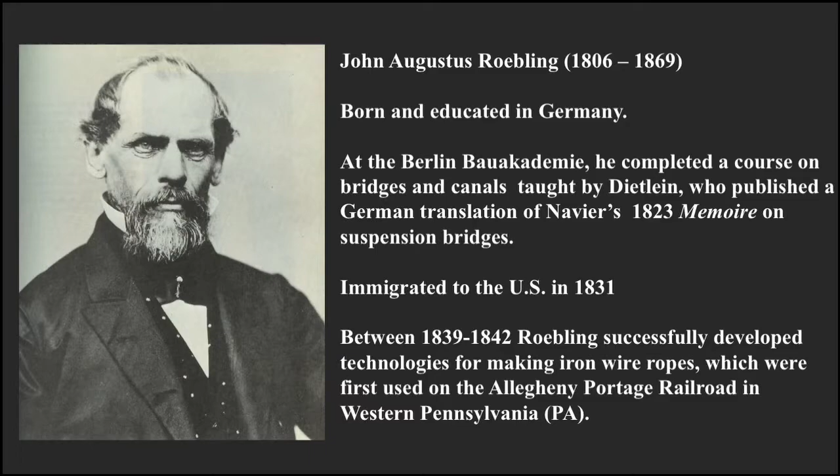His first suspension structures were built between 1845 and 1850. In 1845, he built the Allegheny Aqueduct in Pittsburgh, Pennsylvania, and a year later he completed the Smithfield Street Bridge, also in Pittsburgh. Then between 1847 and 1850, he built 4 suspension aqueducts for the Delaware and Hudson Canal Company in eastern Pennsylvania. Therefore, he built 6 suspension bridges in just 5 years.

Remarkably, Roebling developed 3 fundamental technologies that are still widely used today. The first is the in situ, or in-place, spinning of suspension cables. Second is the tight wrapping of suspension cables with wire. And lastly, he developed cable anchorages that are easily constructed, functional, and permanent.

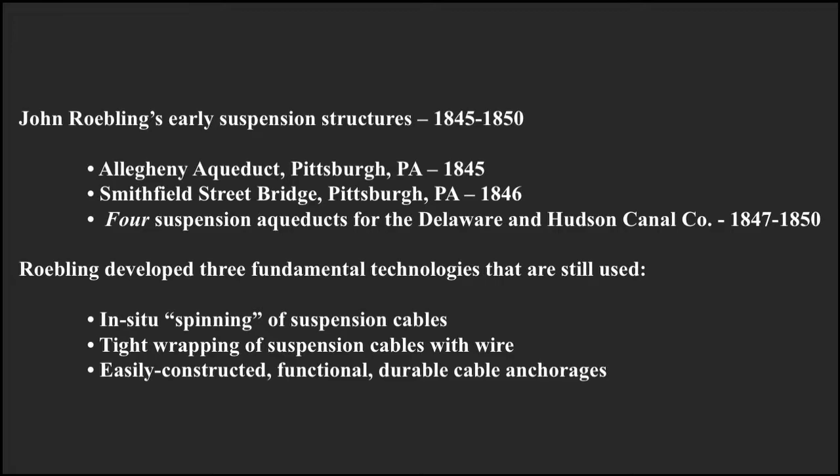The basic cable spinning method devised by Roebling in 1845 is shown on this sketch. Roebling built 2 horizontal wood pulleys, or sheaves, about 10 feet in diameter on opposite sides of the river, about 1,100 feet apart. He then strung an iron wire clothesline, or paternoster, between them, with vertical supports spaced 340 feet apart. He attached 2 spinning wheels, as shown, on the clothesline.

Roebling pre-spliced and wound iron wire on large spools. He then placed wire on the wheel rim, held one end, and pulled the spinning wheel across by having a horse rotate the pulley, thus pulling a hairpin of wire across the river. The spinning wheel on the other side of the clothesline came back empty, but the process was repeated by rotating the pulley in the opposite direction.

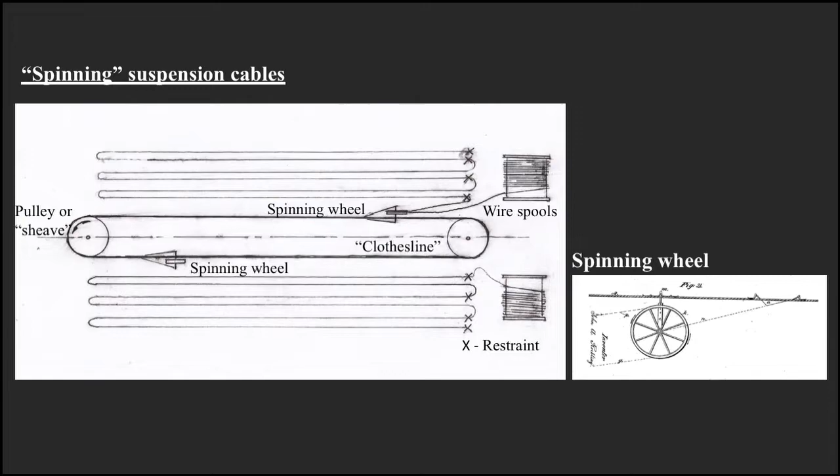Once the parallel wire cables were assembled, Roebling wrapped them tightly with wire using his patented machine. This method is still used today, after 175 years. It is a very effective way of inhibiting corrosion of the wires and moderating differences in the temperatures of the wires when, say, one side of the cable is in direct sunlight.

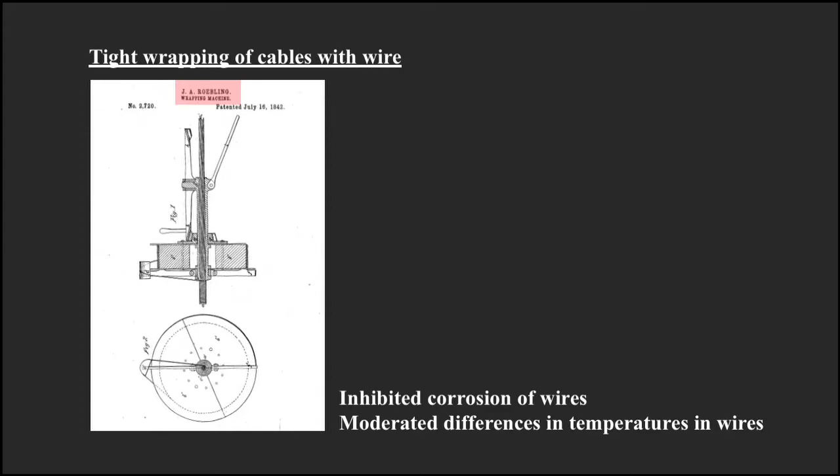In 1845, there was no standard method of anchoring cables. Roebling designed easily constructed, effective anchorages that proved to be enduring. His patented anchorage design featured a transition from wire cables to wrought iron eye bars outside of the anchorage, and a large cast iron plate for attaching end anchor bars. The wrought iron anchor bars were fully encased in protective hydraulic mortar to inhibit corrosion.

He placed wooden mats at the base of the anchorage to engage the entire masonry mass to resist pullout and overturning. Roebling relied solely on the dead weight of the masonry block for anchorage. He did not rely on the strength of the surrounding soil.

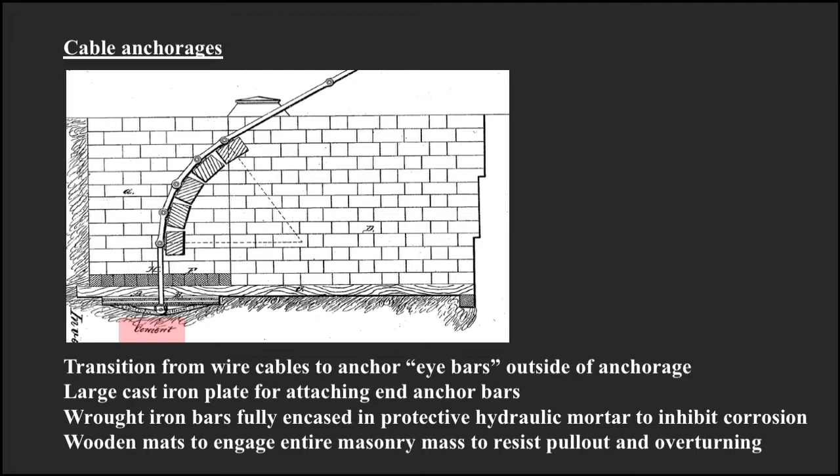John Roebling died, unfortunately, in 1869 after an accident, but his sons, Washington, Charles, and Ferdinand, continued his legacy. Washington Roebling and his wife Emily completed the firm's great work, the Brooklyn Bridge, in 1883. Ferdinand managed financial aspects while Charles focused on improving production technologies. Edmund did not actively participate in the enterprise, and William died as a young boy. However, by 1918, both Ferdinand and Charles had died, and Washington was over 80 years old.

Engineering leadership had to be provided by others, notably by Charles C. Sunderland. Sunderland was born in 1881 in the district of Northowram, County of York, near Halifax, United Kingdom. He immigrated to the U.S. as a 9-year-old boy in 1891. The family settled in Esopus on the Hudson River, about 75 miles north of New York City.

None of his employment records or other papers I examined noted his education. It is possible that he was largely self-educated. Also unknown to me is why he came to seek work in Trenton, New Jersey.

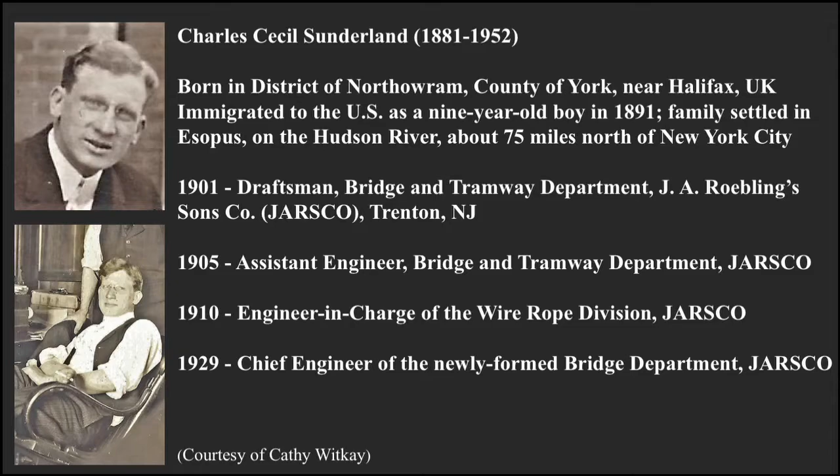In 1901, he was hired as a draftsman in the bridge and tramway department at Roebling's. By 1905, his title was assistant engineer in that department. By 1910, at age 29, he was engineer in charge of the wire rope division, surely one of the most important positions at Roebling's, since wire ropes were their signature product.

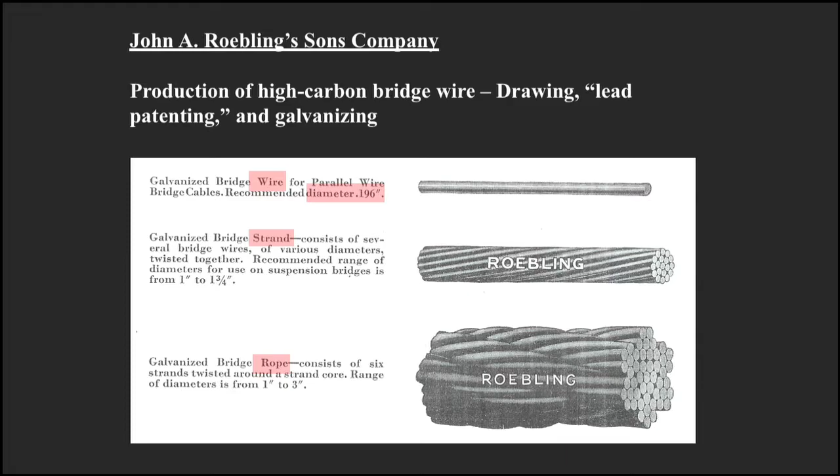The basic component that Roebling produced was high-strength steel wire. Wires were then helically wound to make strands, which in turn were used to make wire rope, a very highly engineered product. Rope designs and rope-making machines were the purview of Charles Roebling.

This is a patent for a specific type of wire rope, filed late in his life in 1915 and only granted in the year of his death, 1918. One of the largest Roebling machines for making rope was about 60 feet tall and held 80 tons of spooled wire on its base. It has been designated a mechanical engineering landmark by the American Society of Mechanical Engineers.

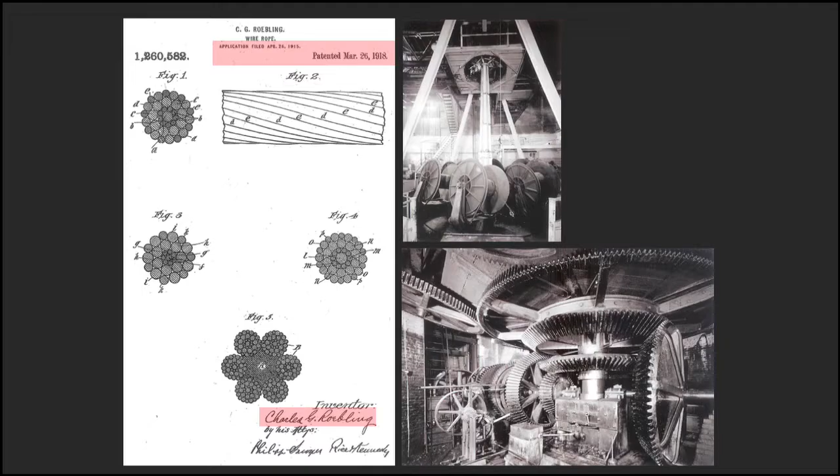Since by 1910 Sunderland was the engineer in charge of the wire rope division, he must have worked very closely with Charles Roebling. In 1926, the year Washington Roebling died, the design of the George Washington Bridge over the Hudson River in New York City was finalized.

The principal design engineers were Othmar Ammann, chief engineer of the Port of New York Authority; Leon Moisseiff, appointed as advisory engineer on design for the Port Authority; and Alston Dana, appointed as engineer of design in charge of the design division, who had a staff of 30 engineers and draftsmen working under him.

Both Dana and Moisseiff had previous experience in suspension bridge design, but this was Ammann's first suspension bridge. The final design had a main span of 3,500 feet and an upper deck with 7 traffic lanes. A second deck for 4 projected rail lines was added only much later. There were 4 main suspension cables, each with a diameter of 36 inches.

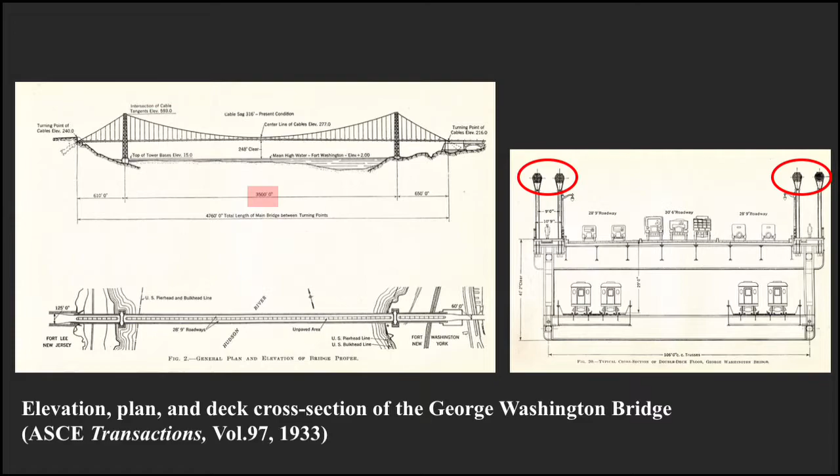Charles C. Sunderland was responsible for preparing Roebling's bid for supplying the wire and anchorage steel and for erecting the cables of the George Washington Bridge. Roebling won the contract with a bid of $12,193,000, which was about 40% of the total cost of the bridge proper.

Sunderland was appointed Roebling's chief engineer for the execution of the George Washington Bridge contract. The scale of the work that Roebling had to complete was unprecedented and daunting.

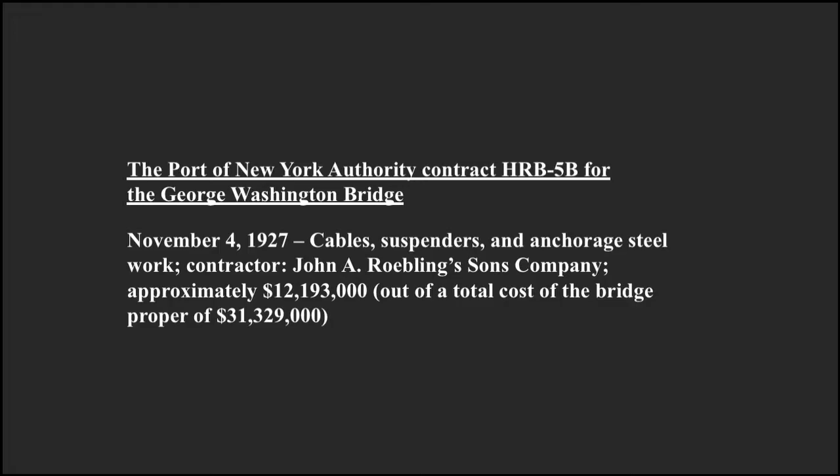This is a table prepared by Sunderland comparing the 6 largest existing suspension bridges with the George Washington Bridge. The most striking fact is that the George Washington Bridge was designed to have a main span of 3,500 feet, twice as long as the previous longest span, which was 1,750 feet, that of the Delaware River, or Benjamin Franklin Bridge, in Philadelphia.

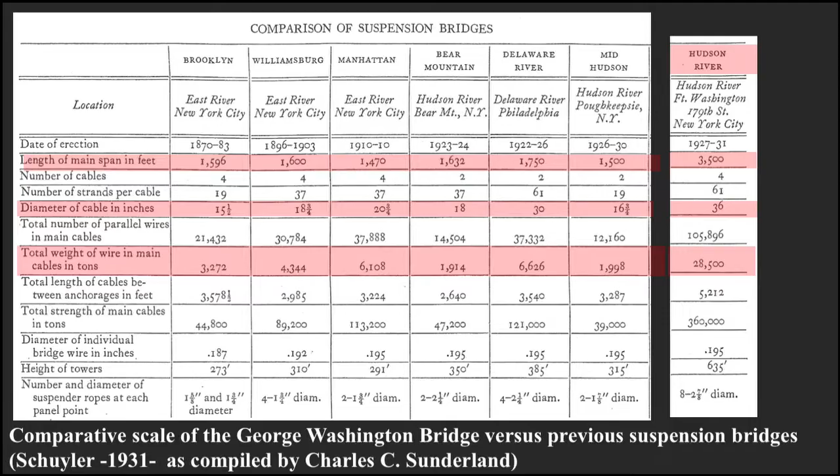The total weight of the wires in the main cables of the George Washington Bridge, 28,500 tons, was greater than the combined weight of all the cables of the 6 largest suspension bridges built to date. The suspender ropes had the largest diameter ever used on a suspension bridge. The ropes were sophisticated assemblies; the 2 7/8 inch diameter ropes had 283 wires of 10 different sizes that made up the rope.

Wire ropes have an irreversible stretch from compaction when an applied load exceeds the tension used during manufacturing. This makes the lengths of the ropes in service uncertain.

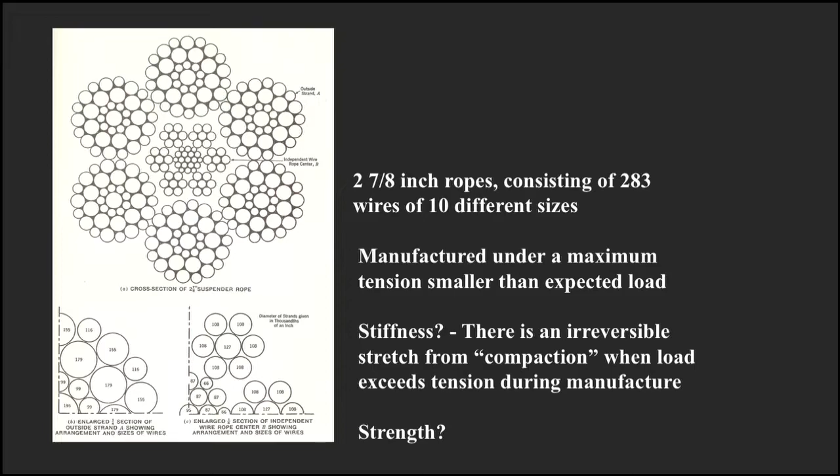To eliminate this uncertainty, Sunderland built a pre-stretcher at Roebling's Kinkora plant. The pre-stretcher was an 1,875-foot long bed with a fixed reaction block at one end and hydraulic cylinders at the other end that stretched ropes to 125% of their expected service load. This made it possible to know their exact lengths when in service. Moreover, the pre-stretching increased the stiffness of the ropes, or the force required to produce any given stretch.

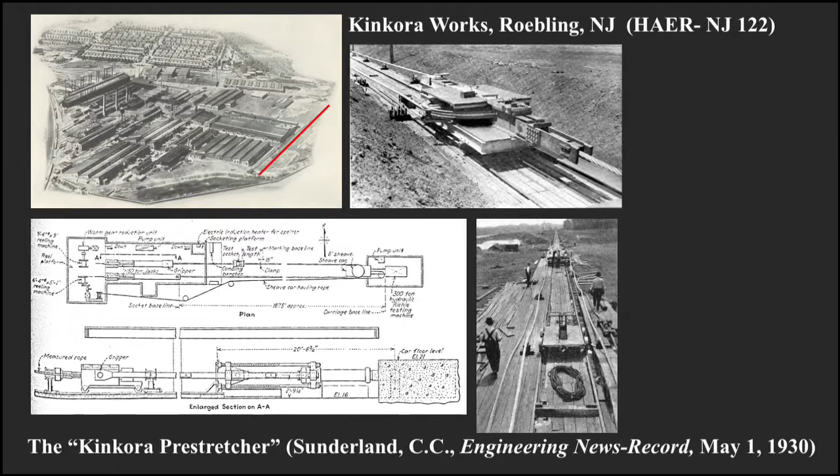The image shows that the moving end had a large sheave or pulley so that ropes as long as 3,750 feet could be pre-stretched. The strength of such large ropes could not be determined with any available equipment.

Therefore, Sunderland commissioned a testing machine that could apply 2,500,000 pounds of force, greater than the capacity of all previous testing machines. It is amusing to read test descriptions which describe the anxiety at hearing the first wire failure and the report and the building vibrations produced when a wire rope finally broke.

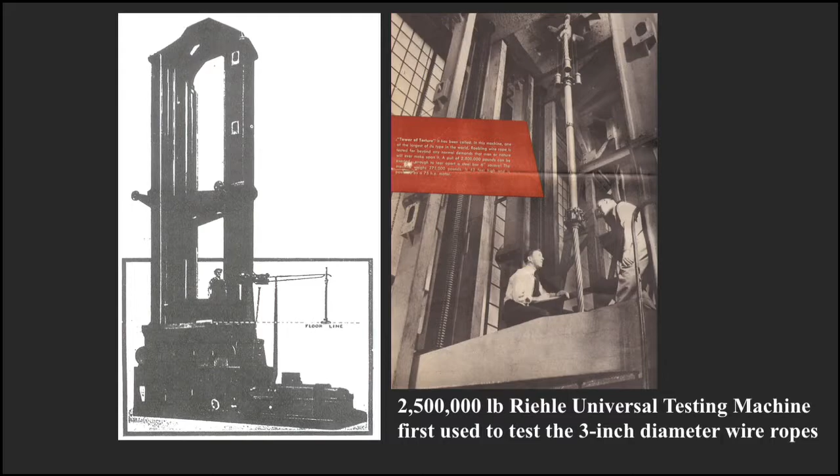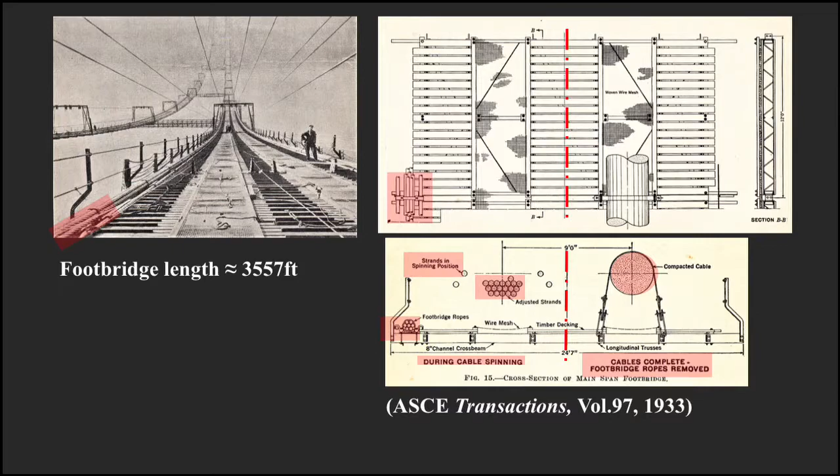Long wire lengths were obtained by splicing. Sunderland carried out rigorous testing to verify the capacity of the wire splices. Almost 12,000 tests of splices were performed, which indicated that they, on average, developed 98% of the strength of the wire. Splices were made by deforming the ends of the wires and then pressing or swaging 2.5-inch long sleeves, a quick, elegant, effective process devised by Roebling.

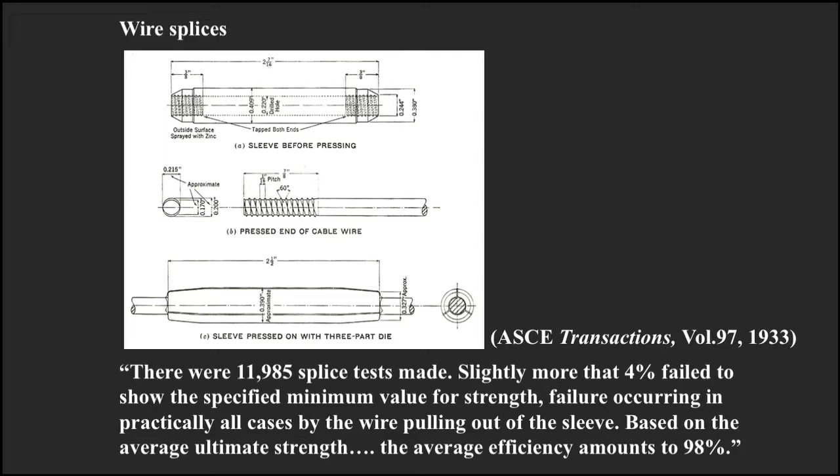The wire spinning process, although it still used the wheels conceived by John Roebling, was much more sophisticated in its control and rate of placement. This is a drawing from the Transactions of the American Society of Civil Engineers. The actual operation is difficult to describe, but in chapter 24 of Hamilton Schuyler's 1931 book, The Roeblings, Sunderland, who wrote the chapter, listed 16 features of the cable spinning process developed specifically for the George Washington Bridge. Sunderland stated that they were, quote, the result of 2 years' scientific and mechanical investigation in the laboratories of the Roebling Company, unquote.

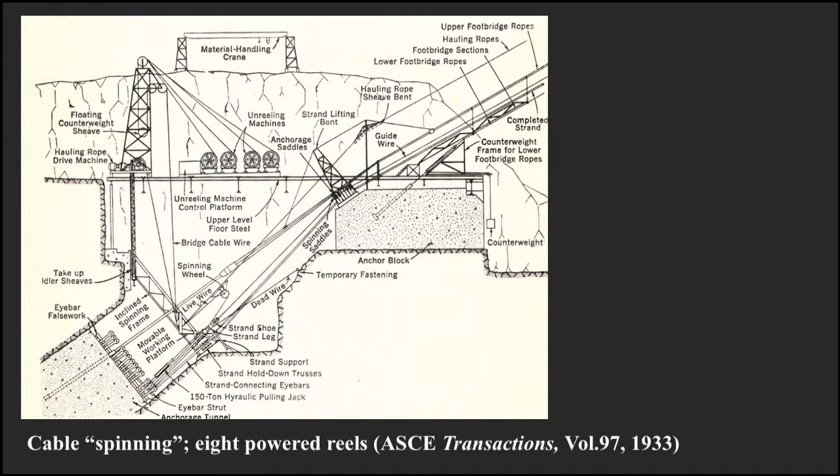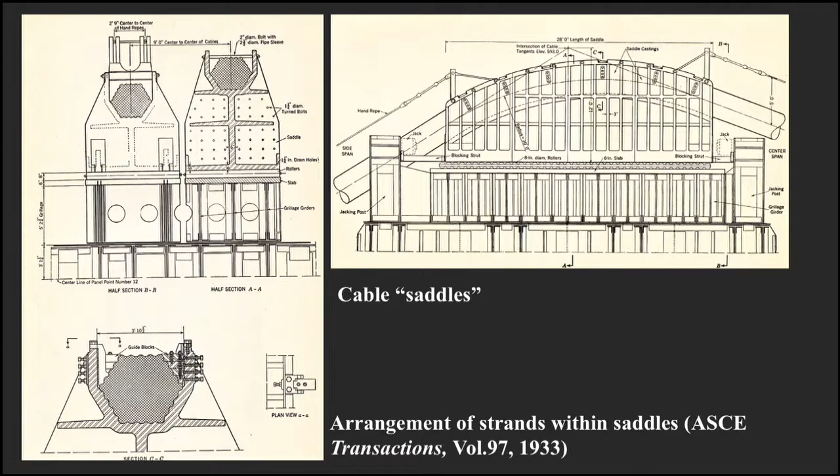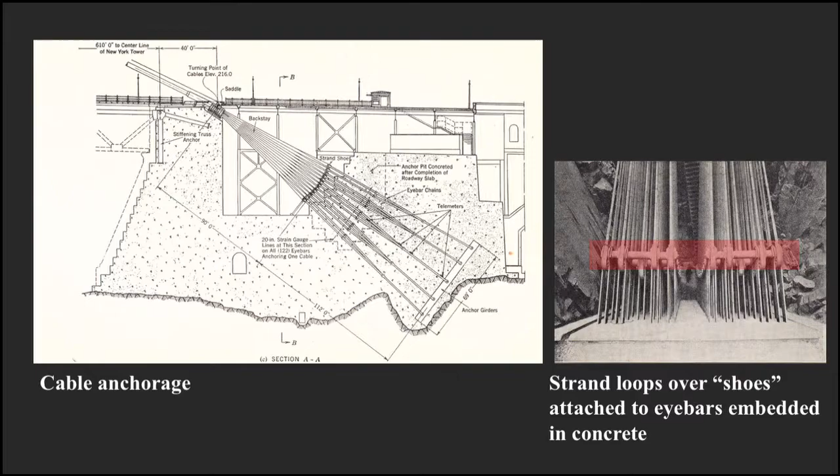After all 61 strands for a cable were assembled, the cable was compacted into a circular shape and then wrapped with wire, as John Roebling did. The weight of the footbridges was then transferred to the main cables, and the wire ropes were repurposed to serve as the suspenders for the deck.

Note that because of the known stiffness of the pre-stretched ropes, they could be cut to precise lengths, and simple, elegant swage connections could be used to support the floor girders. Adjustable turnbuckles were not needed.

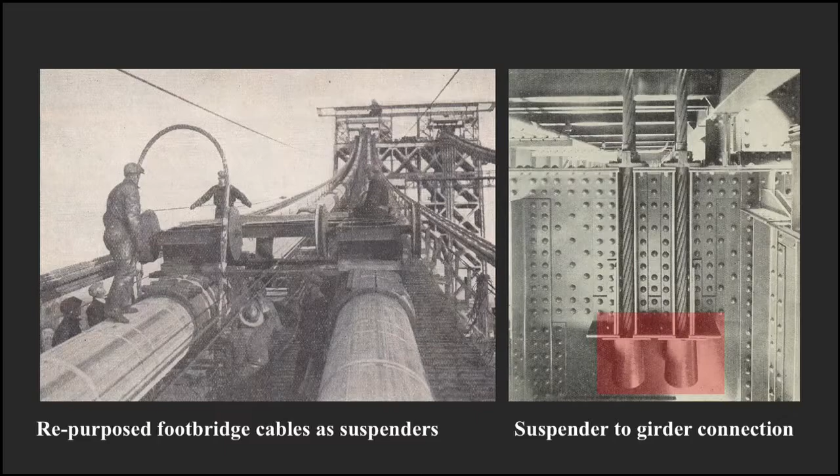Sunderland and his staff of Roebling engineers and ironworkers achieved what was thought to be impossible. Sunderland succinctly observed: according to the contract, one set of 2 cables was to be finished by December 1st, 1930, and a second set of 2 cables was to be completed by December 1st, 1931. Due to the developed improvements by the Roebling Company, it was possible to complete all cables ready for the erection of the steel suspended structure on October 28, 1930. That is, the first set of cables was finished over a month ahead of contract, and at the same time, the second set was completed 13 months ahead of contract requirements.

The record of constructing in position 56 million pounds of bridge wire in a period of 294 calendar days will not be exceeded for some time to come. With Sunderland's leadership, the Roebling Company's achievement allowed the opening of the bridge for vehicular traffic on October 25, 1931, about 8 months ahead of the original schedule.

Othmar Ammann, the chief engineer of the Port Authority of New York, wrote a letter to the Roebling Company and Sunderland stating his appreciation. It reads in part: 'I take this occasion to express to you, on behalf of the engineering staff of the Port Authority, its appreciation of the excellent and efficient manner in which you have carried out this unusual and important work, and in particular also the cooperation which you and your engineering staff have manifested throughout the period of construction.'

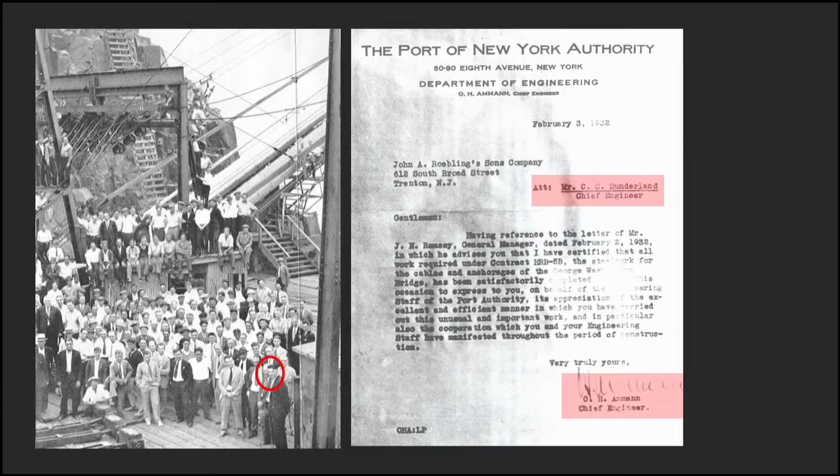The availability of Sunderland's pre-stretcher at Kinkora had an immediate effect on the design of medium-span suspension bridges. The eminent bridge designer David Steinman built 2 medium-span suspension bridges at the time the George Washington Bridge was being erected: the Grand Mere Bridge in Quebec and the St. John's Bridge in Oregon. Steinman realized that Roebling's ability to fabricate very long lengths of strand to a very precise length tolerance meant that main suspension cables could be formed by simply bundling pre-cut, pre-socketed Roebling strands, precluding the need for cable spinning.

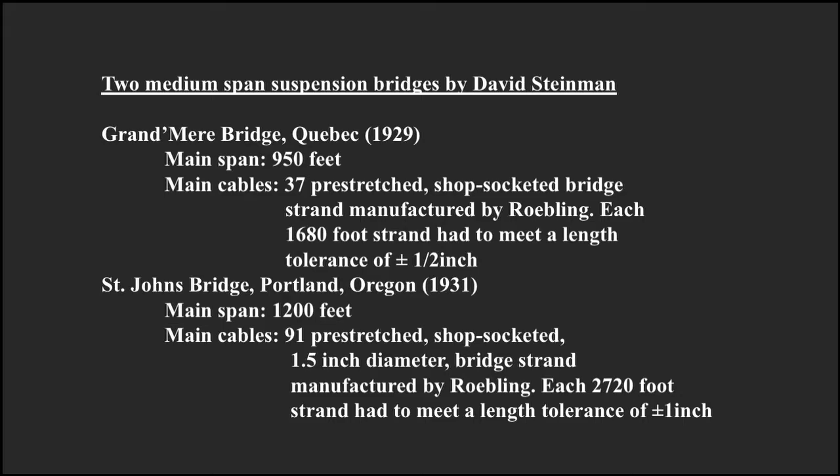For the Grand'Mere Bridge, Steinman used 37 pre-stretched, shop-socketed bridge strand manufactured by Roebling. Each 1,680-foot strand had to meet a length tolerance of plus or minus a half an inch. For the St. John's Bridge, Steinman used 91 bridge strand. Each 2,720-foot strand had to meet a length tolerance of plus or minus 1 inch, a seemingly impossible feat.

Another great advantage of pre-socketed strands is that they greatly simplified the connection to the anchorage bars. By the early 1930s, the Roebling Company not only manufactured unique wire ropes, strands, and end connections, but they also had the engineering and construction expertise to design and erect suspension bridges. However, Roebling leadership evidently elected not to compete with U.S. consulting engineers for U.S. commissions, because the consulting engineers were also potential customers for Roebling's manufactured products.

Roebling did compete for commissions outside the U.S. One example is the San Rafael Bridge in the Dominican Republic. This bridge was designed and completely prefabricated in Trenton, New Jersey, and then erected by the Roebling Company under direct contract with the Dominican government.

Sunderland used 9 pre-stretched, pre-socketed bridge strands, but he did not bundle them and wrap them with wire. Rather, he decided to leave them in an open, parallel arrangement, relying on the galvanizing of the individual wires for corrosion protection. Sunderland espoused this philosophy for subsequent medium-span suspension and other types of bridges.

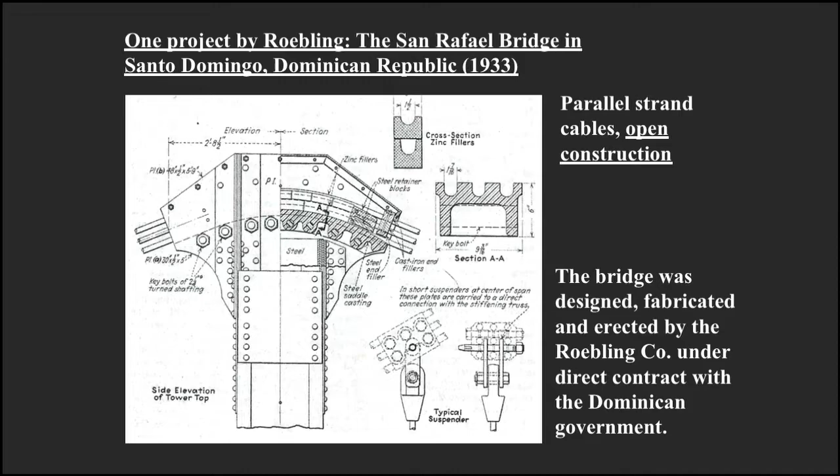Trenton is close to Princeton, New Jersey. This proximity naturally led to collaborations between Roebling engineers and structural engineering students and professors at Princeton. In 1930, at the time of the erection of the George Washington Bridge, a conference was held in Princeton to determine if physical models could be used for final design of suspension bridges.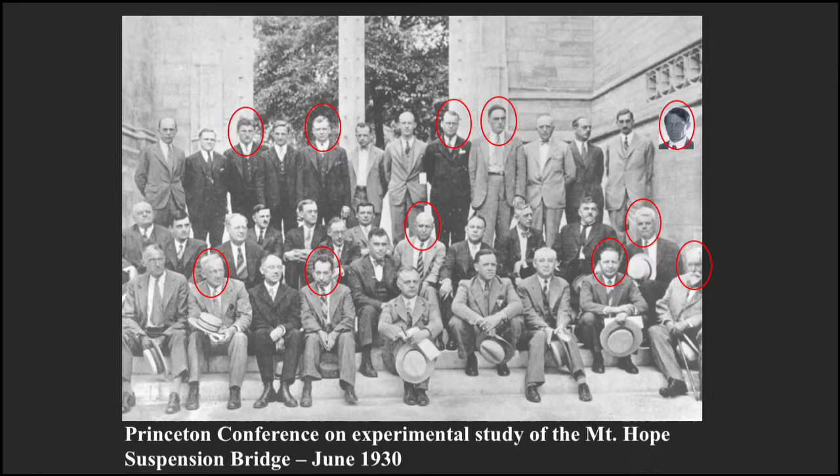Birdsall is in the back row, last row, third from left. Ammann also attended the conference, but chose not to be in the group photo, so I've added his image on the right-hand side. The observations from the experimental work were summarized in a paper written by Beggs, Timby, and Birdsall.

The principal conclusion was that it appears practicable to resort to physical model analysis for the design of suspension bridges of novel but useful types too difficult for mathematical analysis. But most importantly, Blair Birdsall joined the Roebling Company in 1934, bringing expertise and a disposition toward the use of physical models for design of innovative systems.

Over an 18-year collaboration, Sunderland and Birdsall truly bonded as mentor and protege. It was Birdsall's extreme good fortune that Roebling won the contract to supply the wire and erect the main cables of the fabled Golden Gate Bridge, and that he was assigned to work on the erection of the cables. Blair Birdsall noted that in preparation for work on the Golden Gate Bridge, the then chief engineer of the Roebling Bridge Division, Charles C. Sunderland, developed a much improved scheme for cable construction.

The drawing compares the cable construction at the saddles of the George Washington Bridge and of the Golden Gate Bridge. For the George Washington Bridge, Sunderland used uniformly sized strands with 434 wires, layered horizontally with the hexagon side at the base of the saddle. For the Golden Gate Bridge, Sunderland used strands of sizes varying from 256 to 472 wires. He stacked the strands in vertical columns with a hexagon apex at the base of the saddle.

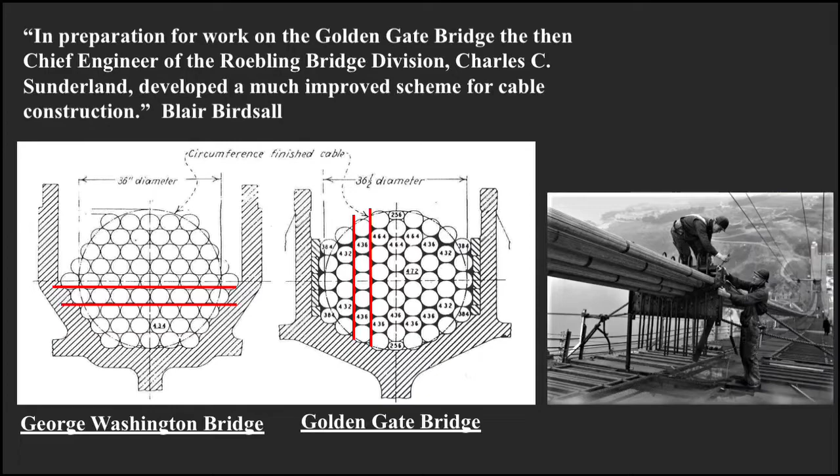Here are statements from two late 20th century prominent British and Japanese suspension bridge designers. All the major British suspension bridges have main cables that are of the built in situ parallel wire type, pioneered in the USA by John A. Roebling.

Subsequently, British contractors have been able to act on their own, but the system used has always been essentially Roebling, with the strands set in a vertical rather than a horizontal hexagonal form. Dr. William C. Brown, partner of Freeman Fox and Partners.

Because of the good experience with Roebling strand arrangement in the Kanmon Bridge, all the cable arrangements of bridges under the Honshu-Shikoku Bridge project were designed with a vertical hexagon apex. Ichiro Konishi.

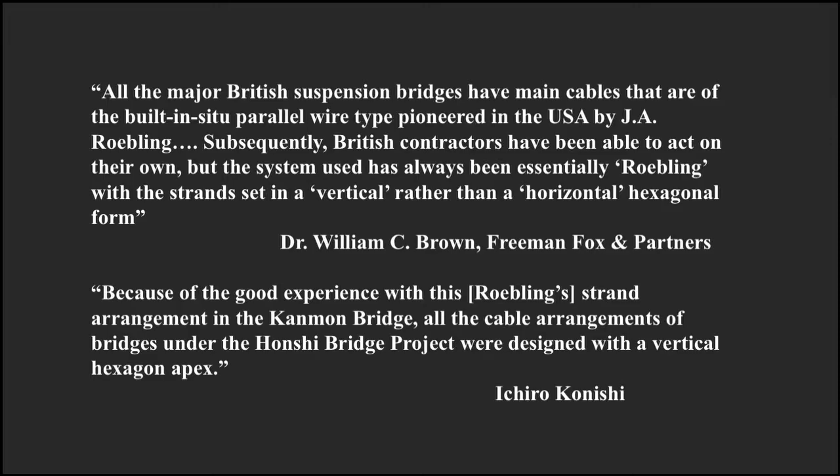But after the euphoria of the great design and construction successes of the George Washington and Golden Gate bridges, American engineers received a blunt lesson. The Tacoma Narrows Bridge collapsed in a windstorm on November 7, 1940. The film of Galloping Gertie tearing itself apart has been seen by practically everyone.

The failure occurred because design engineers did not understand the dynamic forces caused by wind, nor how to design a deck to limit dynamic responses. Of course, several investigative bodies were formed. The most prominent was convened by the American Institute of Steel Construction and the Public Roads Administration. Sunderland and Birdsall were members, and the Roebling Company heavily subsidized the cost of board activities.

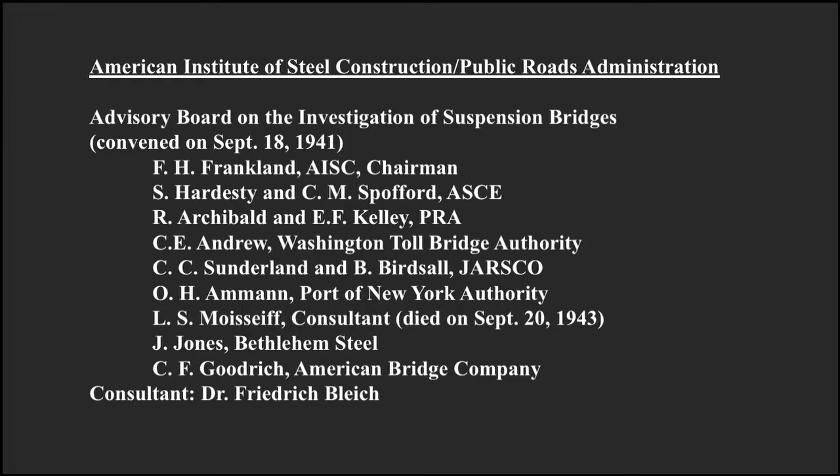But after December 1941, the nation was focused on the war effort. The scope of Roebling expertise on suspension bridges in the early 1940s is illustrated by the Peace River Bridge of the Alaska Highway in British Columbia. The highway was then considered an important military route.

The elevation shows that the bridge had a main span of 930 feet and an overall length of 2,130 feet. Roebling was authorized to proceed with the superstructure on November 23, 1942, and the bridge opened to military traffic on August 4, 1943. Roebling fabricated all superstructure components in Trenton, shipped them 3,000 miles, and erected the bridge in less than 8 months. The design showcased Roebling features and Roebling products.

The main cables consisted of 24 pre-stretched, pre-socketed, galvanized 1 7/8 inch diameter bridge strands arranged in an open array as advocated by Sunderland. The prefabricated strands were hauled over the river by a continuous 1-inch diameter hauling rope.

Unfortunately, the tower foundations were not adequately protected, and by 1955 the river had severely scoured the foundations. In 1957, a leak in a water main caused movement of the north anchorage and eventual collapse of the bridge. In June 1944, Roebling received a contract from the U.S.

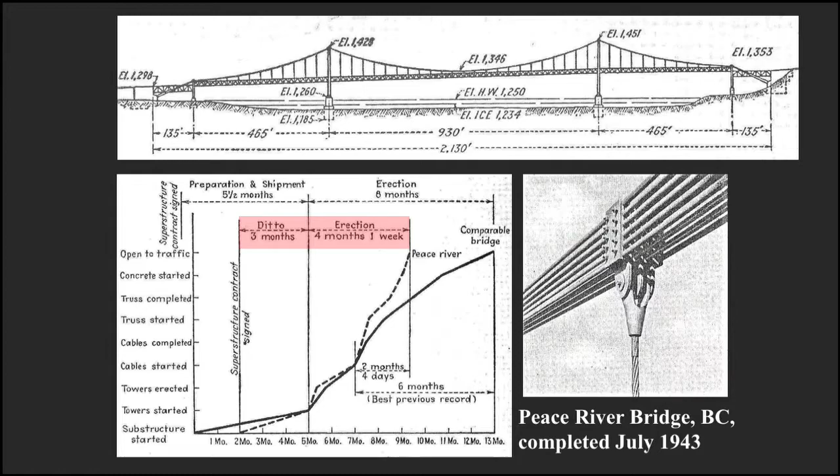Army to design a suspension bridge of 600-foot span that could carry Army tanks. Because of the collapse of the Tacoma Narrows Bridge, Sunderland had already considered alternate ways of stiffening suspension bridges and had conceptualized a new form called a cable truss.

The system devised by Sunderland did not rely on a bridge deck to augment the stiffness of a suspension bridge. Rather, it was a truss-like system, but with all tension or cable members. Its stiffness was increased by tensioning the bottom chord, which increased the tensile forces in the members and thus their stiffness. However, Sunderland's cable truss was very difficult to analyze mathematically.

Therefore, Birdsall and Sunderland built a 1/10 scale physical model and predicted behavior of the full-scale bridge from measurements of model responses. The image on the left shows model vehicles, presumably models of tanks, traversing the model bridge.

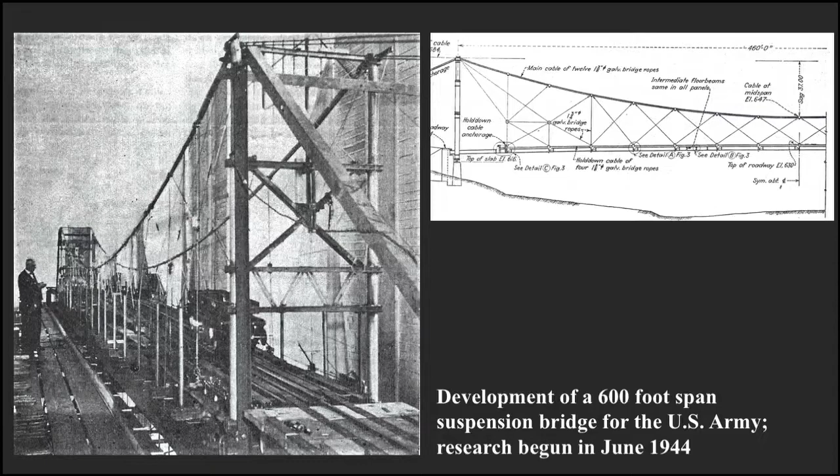Because the war ended before the research was completed, the U.S. Army canceled the contract, and a full-scale prototype bridge was never built in the United States. This is a Roebling publicity photo showing Birdsall and Sunderland pretending to be taking readings from the model.

In 1948, the Roebling Company won a contract to design and build a bridge over the Rio Lempa, near the town of San Marcos in El Salvador. Sunderland and Birdsall decided to design, fabricate, and erect their first cable truss bridge. It was a 5-span bridge with a total length of 2,550 feet.

The deck and longitudinal girder were very slender because they were not designed to increase stiffness. The bridge was completely prefabricated in Trenton and shipped to El Salvador. Following Sunderland's philosophy, the top chord consisted of an open array of 24 pre-stretched, pre-socketed, galvanized bridge strands, very similar to the arrangement used for the Peace River Bridge.

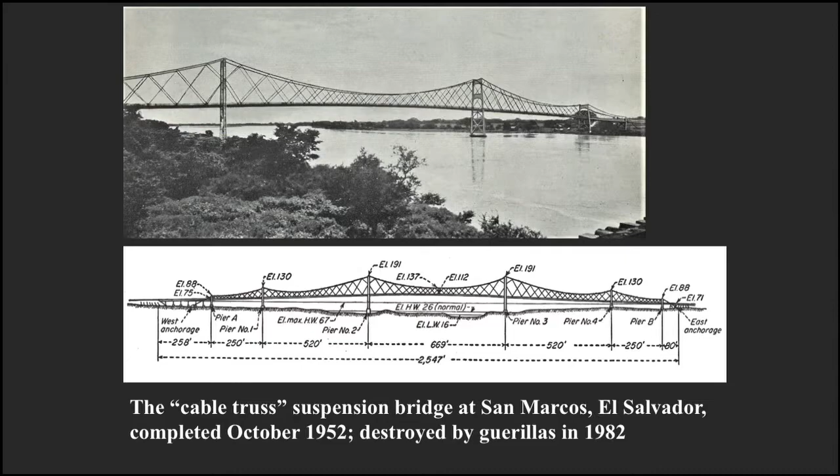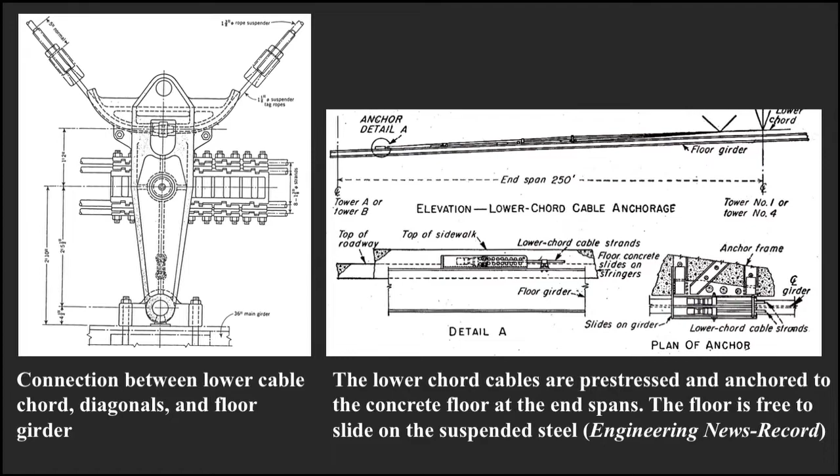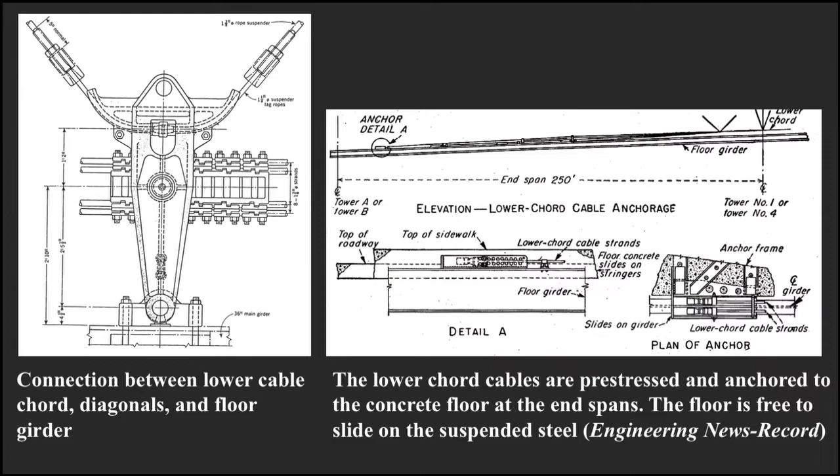The San Marcos Bridge was certainly one of the most innovative bridges built in the mid-20th century. It was uniquely a Roebling achievement, with a design based on their experimental research, with Roebling wire strands and end connections, and with many unique Roebling steel forgings and castings.

No other manufacturer or consulting engineering firm in the world had the breadth of engineering knowledge, manufacturing capabilities, and construction expertise to conceive and execute such a design.

But Sunderland always prioritized the Roebling Company as a manufacturer, financially dependent on selling wire products, which meant anticipating and creating markets for their products. Therefore, in 1944, Sunderland also began research on prestressed concrete and later collaborated with Leo Koth, a British engineer who immigrated to the United States.

Prestressing concrete in compression minimizes cracking and hence increases the stiffness of reinforced concrete products. Prestressing concrete is effective in the long term only if very high strength steel is used. The technology was pioneered in Europe in the 1920s, and European engineers and builders had the most experience.

However, Sunderland knew that Roebling wire, rope, strand, and anchorage products were as good or better than those available in Europe. Moreover, Roebling had a unique experience with prestressing steel structures, as exemplified by the San Marcos Bridge.

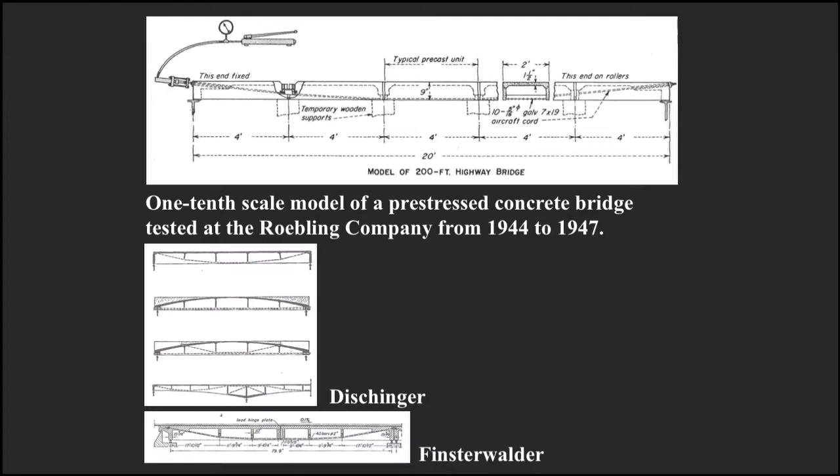Concurrently, Sunderland, Birdsall, and Koth thought of potential applications of post-tension concrete. One of their ideas was that post-tensioning could be used to achieve crack-free concrete airport runways.

In October 1946, the top slab was post-tensioned in 2 directions, inducing a compressive stress of about 700 pounds per square inch in the concrete. The concept was that the prestressed slab would float over the base slab and remain uncracked.

The former Roebling warehouse exists and is currently a self-storage facility. In 2007, the parts of the floor that were visible were crack-free. The floor is without doubt the oldest prestressed floor system in the United States.

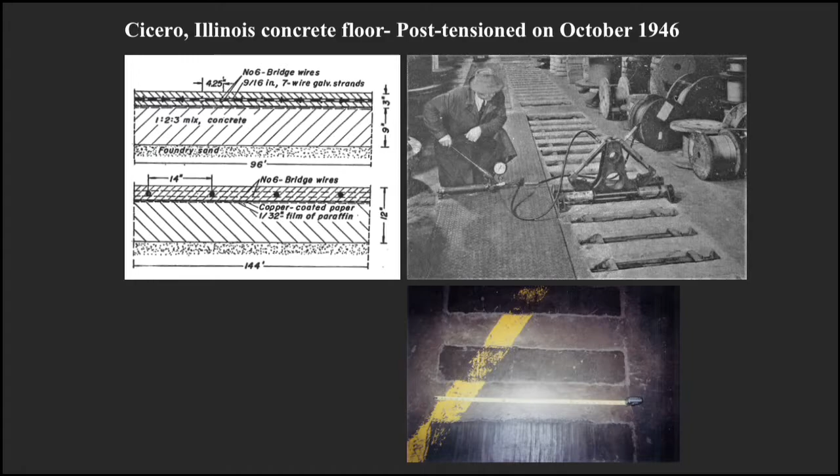Sunderland used post-tension modular concrete floors for other Roebling-designed bridges. The floor of Roebling's Lumberville pedestrian bridge over the Delaware River was precast using 4-foot by 9-foot modules and then post-tensioned in 2 directions. This was a relatively small job, but it was surely done as a marketing demonstration of the potential of prestressed concrete and the usefulness of Roebling products.

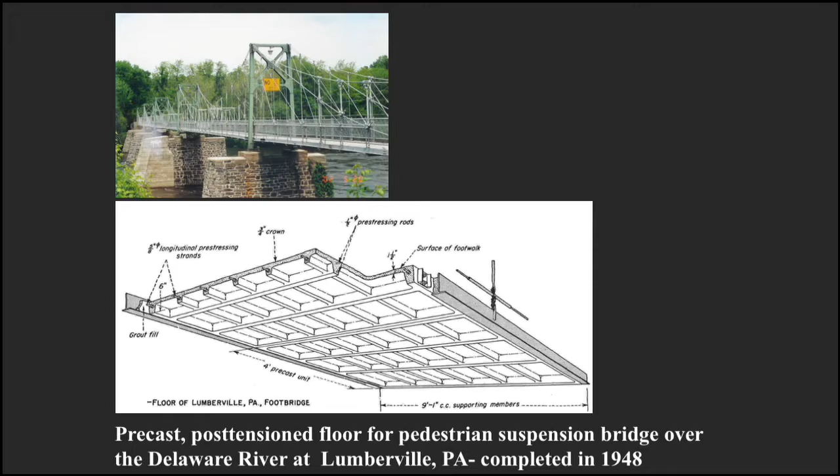Another bridge designed, fabricated, and erected by Roebling was the Rio Paz suspension bridge between Guatemala and El Salvador, completed in 1949. The Sunderland-type main cable, consisting of an open array of bridge strands, the bolted plates for connecting the suspenders, and the socketed suspenders are all distinctly Roebling features.

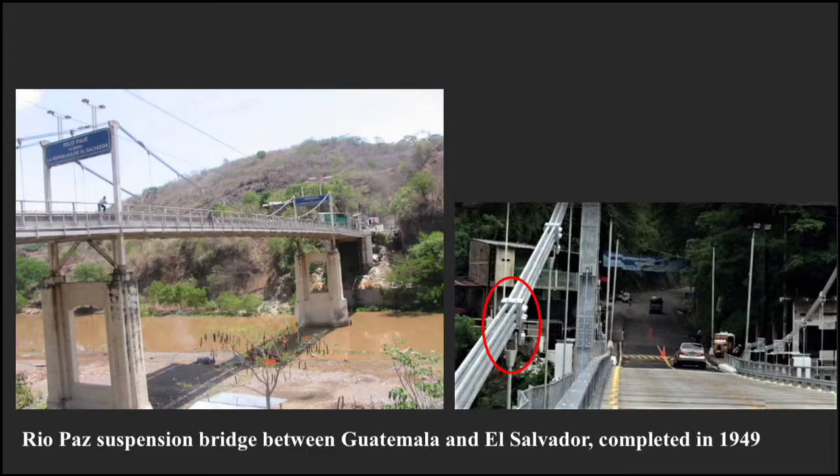The floor of the bridge was precast in 21-inch by 21 feet 7-inch modules. The modules were then post-tensioned along their lengths and then post-tensioned together longitudinally. The Rio Paz bridge is extant, but I am uncertain whether the deck is still the original one.

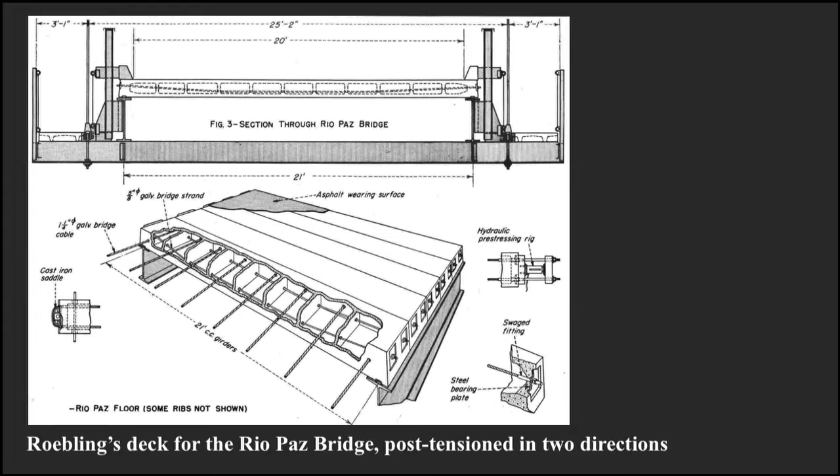The first great opportunity for Roebling to showcase its capabilities in prestressed concrete in the United States came from the city of Philadelphia, downriver from Trenton. The city needed to replace a bridge to carry Walnut Lane over Lincoln Drive and Wissahickon Creek.

After 2 bids for stone-faced concrete arches exceeded the budget, the city in 1947 indicated a willingness to consider a prestressed concrete bridge proposal.

The first proposal for a pre-stressed concrete bridge on Walnut Lane in Philadelphia was made by Leo Koth, Charles Sunderland, and the John A. Roebling's Sons Company. This is a rendering of the Koth-Sunderland-Roebling proposal, which featured haunched continuous girders.

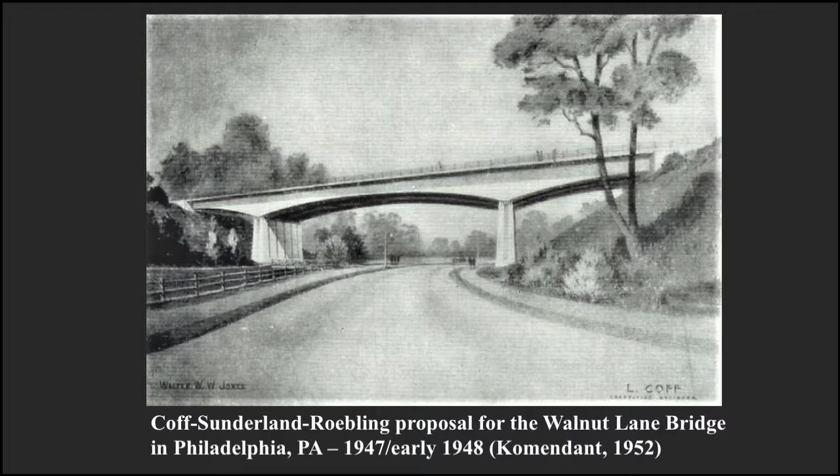Some structural details of the design are given by these drawings. There are 3 box girders with variable depth and continuous draped pre-stressing ropes. It is an astonishingly advanced design that would be considered modern if built and designed today.

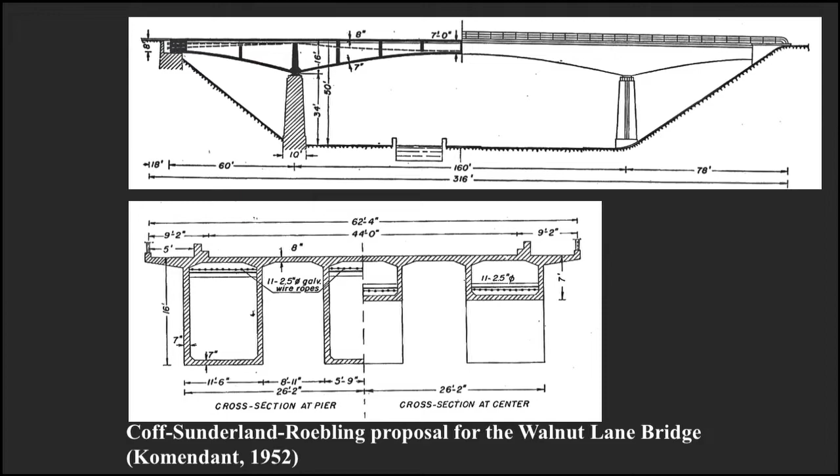It features all the Sunderland principles: post-tensioning, meaning that the concrete is cast first, cured, and then pre-stressed; large galvanized tendons; continuous tendons; unbonded tendons; accessible for inspection; and compact swaged anchorages.

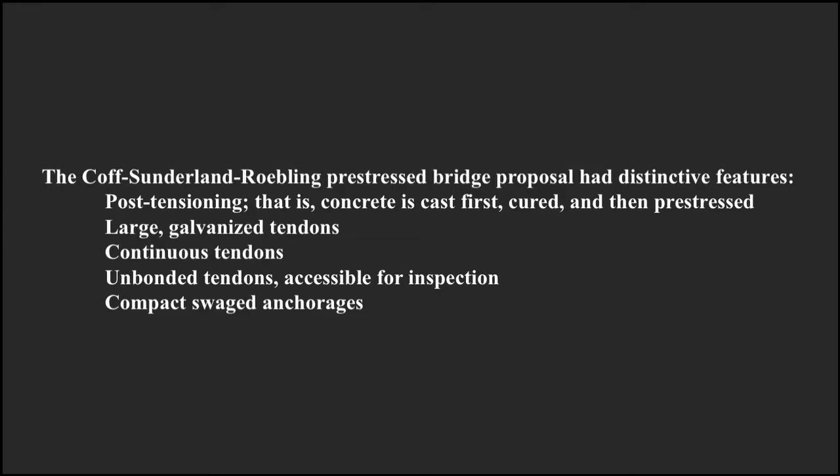Regrettably, the Sunderland-Roebling design was perhaps too advanced. The city of Philadelphia selected the design of Professor Gustave Magnel, a well-known Belgian engineer in prestressed concrete, who had made a later proposal in April 1948.

Sunderland did not object to the award, consistent with his prioritization of the Roebling Company as a manufacturer of wire products. But Magnel, in fact, chose to use Roebling's high-strength ungalvanized cold-drawn wire for the Walnut Lane Bridge, which was arguably better than any European product.

Magnel's Walnut Lane Bridge opened to traffic on February 1, 1951, and is traditionally considered the first prestressed concrete bridge in the United States. Despite Sunderland's disappointment, Roebling post-tensioning systems inspired several other pioneers in prestressed concrete.

Ross Bryan in Tennessee and C.L. Johnson in Michigan built bridges using Roebling post-tensioning products. These early bridges were built at the same time as the Walnut Lane Bridge, but received much less publicity and recognition.

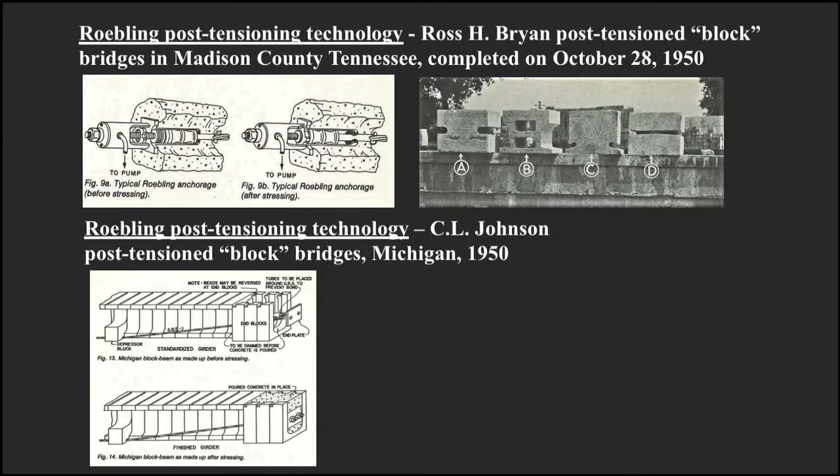Because Sunderland began research on prestressed concrete in 1944, by the early 1950s Roebling produced a variety of products for the prestressed concrete industry.

Roebling produced strands up to 1 11/16 inches in diameter for design loads up to 208,000 pounds, and corresponding compact end fittings that were certified to carry the design load.

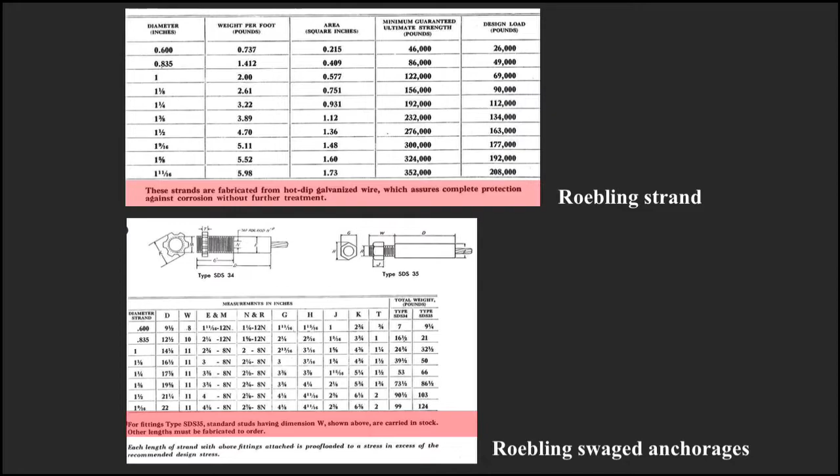But the real fruition of Sunderland's vision of post-tension concrete bridges with unbonded, galvanized, accessible tendons was realized not in the U.S. but abroad, in Cuba, shortly after his retirement and death in 1952.

They are the Canas River Bridge of 1952, the Agabama Bridge of 1953, the Arimao and Cuyaguateje bridges built in 1954, and the Felipe Pazos Bridge of 1956.

The Canas River Bridge had a central span of 250 feet, and the tendons were draped to increase their efficiency. The strands were galvanized and coated with bitumastic paint to minimize corrosion.

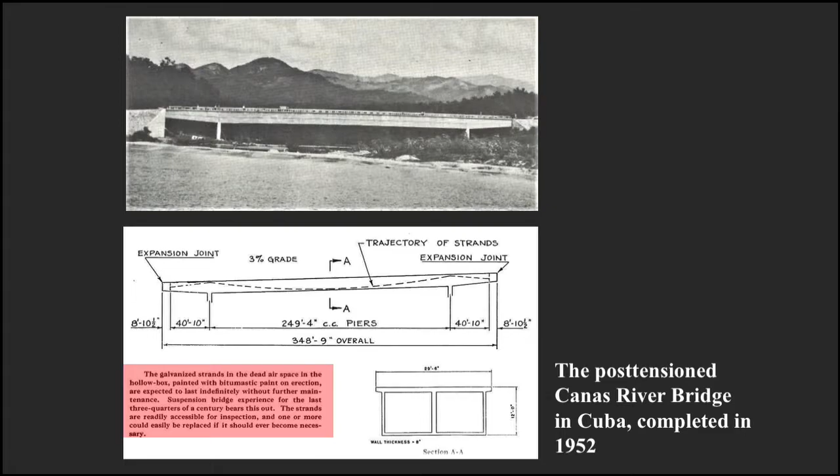The highlighted note underscores Sunderland's philosophy. It states in part, 'The strands are readily accessible for inspection, and one or more could easily be replaced if it should ever become necessary.'

The Cuyaguateje Bridge extended the main span to 300 feet with a variable box girder depth, improving both the appearance and the structural efficiency.

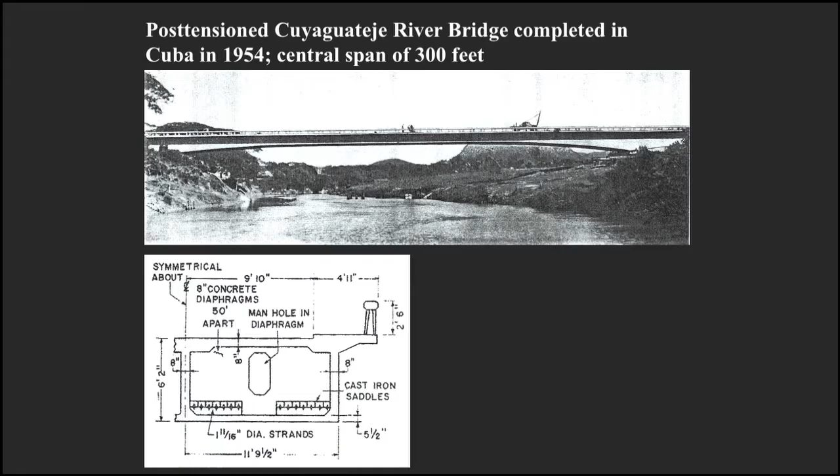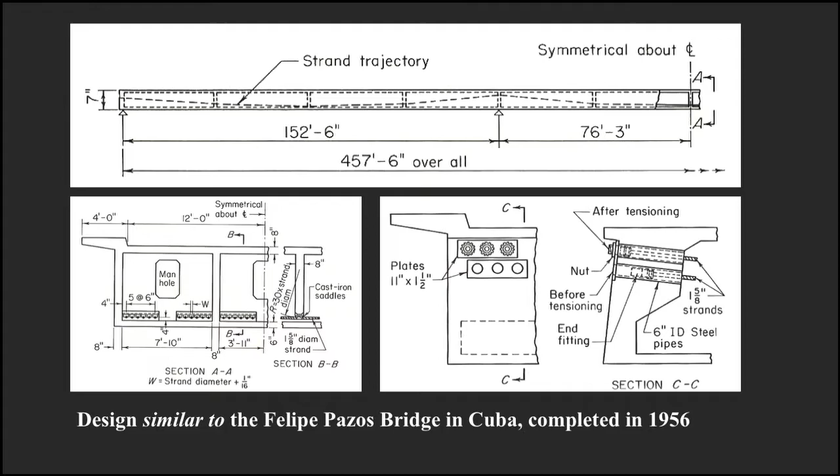In summary, Charles Sunderland, the John A. Roebling's Sons Company, together with consulting engineer Leo Koth, developed a complete American concrete post-tensioning technology from 1944 to 1952.

This included high-strength, stress-relieved 7-wire strand, high-strength, large-diameter galvanized and pre-stretched strands and ropes, compact swaged anchorage systems, and box girder bridge designs with accessible, unbonded, large-diameter continuous tendons.

Box girder bridge designs with accessible, unbonded, large-diameter continuous tendons. The extant post-tension bridges in Cuba are strong vindication of the Sunderland-Roebling-Coff approach or philosophy to corrosion protection.

Sunderland's legacy is perhaps best appreciated by his peers. These are a few testimonials to his character, vision, and engineering contributions.

On main cables of suspension bridges: in preparation for work on the Golden Gate Bridge, the then chief engineer of the Roebling Bridge Division, Charles C. Sunderland, developed a much improved scheme for cable construction.

The genius of the man responsible for the cables of the longest spans in the world.

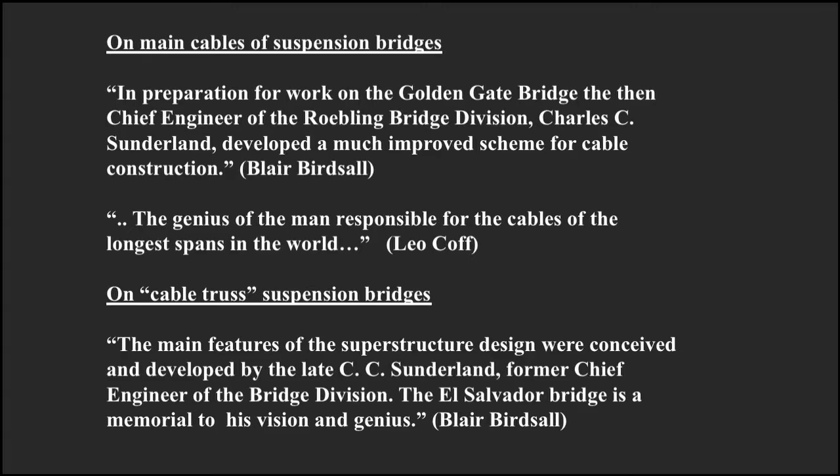On cable truss suspension bridges, the main features of the superstructure design were conceived and developed by the late Charles C. Sunderland, former chief engineer of the Bridge Division. The El Salvador Bridge is a memorial to his vision and genius.

On pre-stressed and post-tension concrete, it is understandable that the great Charles C. Sunderland would follow the example set by the Roeblings.

Thanks to the vision of Mr. Sunderland, we started development work on adapting the principles of pre-stressed concrete to American practice in 1944, and by the time these principles became sufficiently recognized in this country to begin to produce a market for wire, we were thoroughly

entrenched as one of the recognized authorities in the field. Our only regret is that one of the grand pioneers, our former chief at the Roebling Company, boss Sunny Sunderland,

cannot be present to view with satisfaction the fruits of his vision. Thank you.